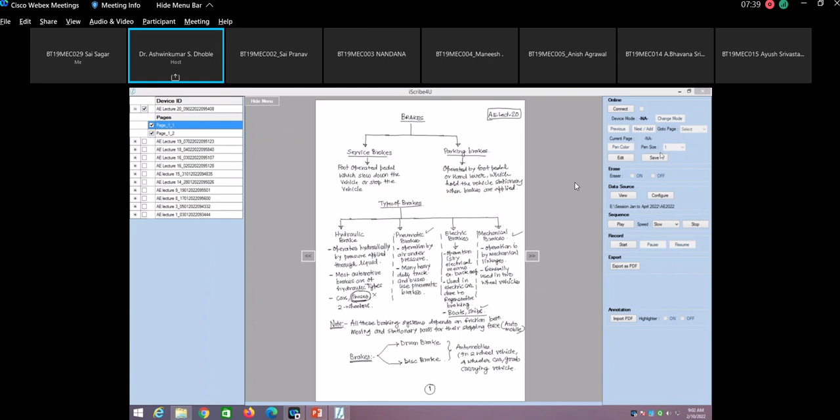So yesterday we were discussing the topic related to brakes, and there we have seen that different types of brakes are available. The requirement of the brake is that if you apply the brakes too hard, the wheels lock up, and as a result the vehicle skids sideways. If the brakes are applied less hard, the wheels continue to rotate. That means in both cases it is not advisable to apply the brake very hard or less hard. So there has to be some golden mean between the brake effort and the brake system. The brake must be applied to the point at which the wheels are almost ready to lock, on the verge of locking but not getting locked. So this was the brief background.

So with this background, we will start with the first type of brake, that is the drum brake, and I will draw the figure for the drum brake, how it looks. Today we are going to discuss the drum brake. This you have studied, but here we need to fully take up the topic on the drum brake.

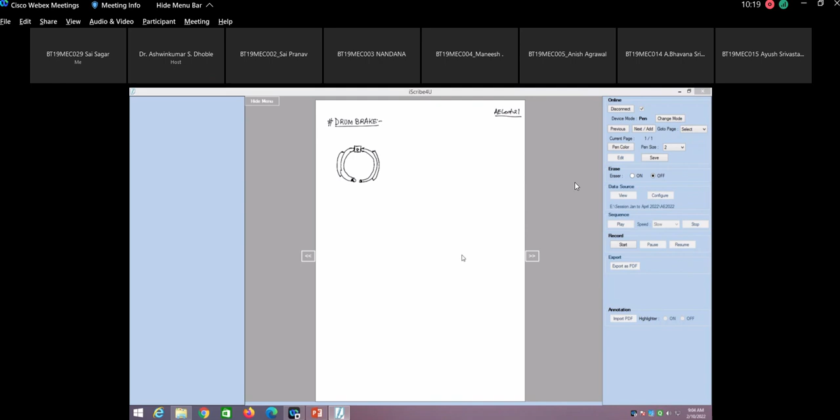So here we have got the small cam, and here is the brake shoe surface. So brake shoes are made like this. This is pivoted at this particular point, and here we are going to have the friction lining. I will draw the friction lining with some different color.

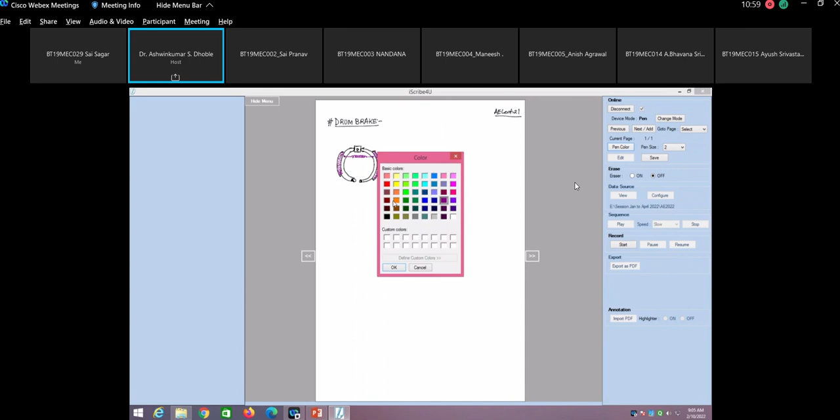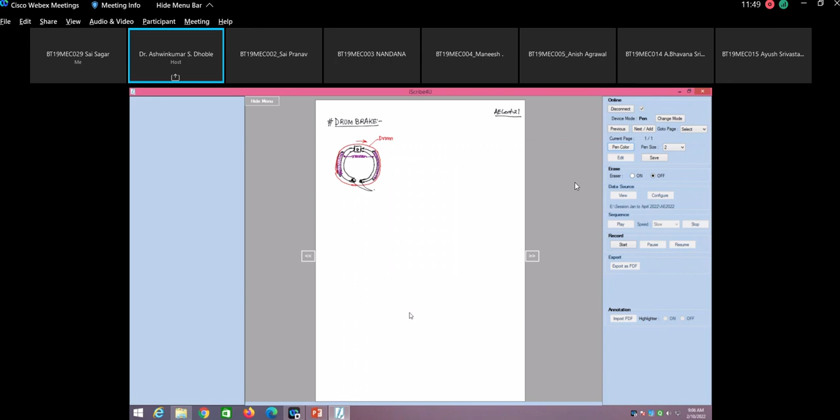So this is the friction lining. There is a spring connected in between this shoe, and the outer portion of this is basically the drum, the red color one which I have shown here is the drum. So these brake shoes are pivoted at this particular point. These are the anchor points. This is the spring. This is called the friction lining.

What is this part? This is which part? The square one on the top is which part of the brake? What do you call that? This is which part? No, that is not the pivot. That is basically a cam.

So when you operate the cam, that is the actuator part, that is correct. That is the cam, you can say that. When you apply it, what is going to happen if you rotate this particular cam, the shoes will move apart in this particular direction because they are pivoted at this point. So the friction lining material comes in contact with the drum, and that is how they absorb the kinetic energy of the rotating drum, and the speed is reduced.

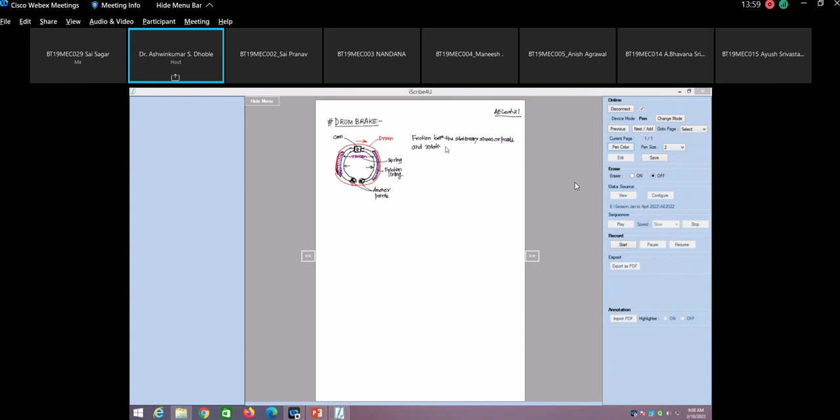Okay, so this is basically the background. The friction between the stationary shoes or pad and the rotating drum or disc produces the braking action that slows or stops the wheels.

So actually these mechanical drum brakes, suppose now the friction lining material wears out. Please try to understand, this is basically the thing that most of the time, most two-wheelers have this kind of brakes. Specifically, if you see the Luna vehicle, nowadays it is not in use, but if you see the Luna vehicle, you will find that such kind of brakes are used. Now in case this friction lining material is worn out and there is a gap, for example, I am just trying to show you only one portion. This is the outer drum and you have got this cam.

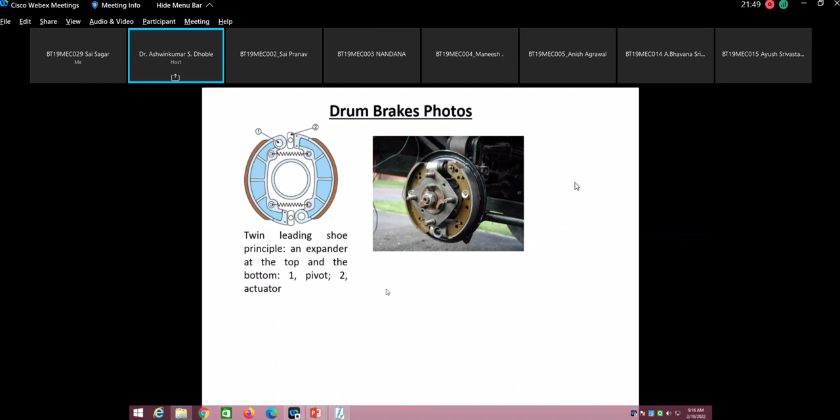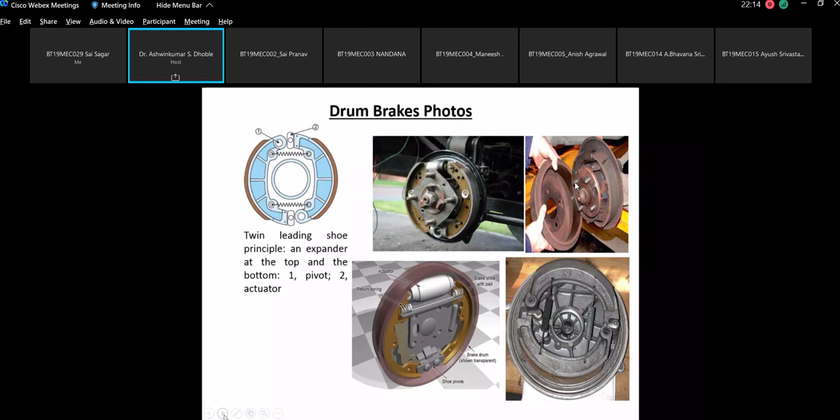The same kind of shoe and construction is shown here. This is basically the actuating cam, and these are the brake shoes. Then this is how you can do the assembly - this is the complete assembly of the brake shoe. This is the brake shoe with pad, the brake drum shown transparent, and the shoe pivot. Here is the other view of the brake drum with spring and cam, everything. In the next slide, it shows the brake assembly completely.

Now next is the disc brake. We'll try to see what you mean by disc brakes. Is this clear? Does anybody have any doubt as far as the drum brakes are concerned?

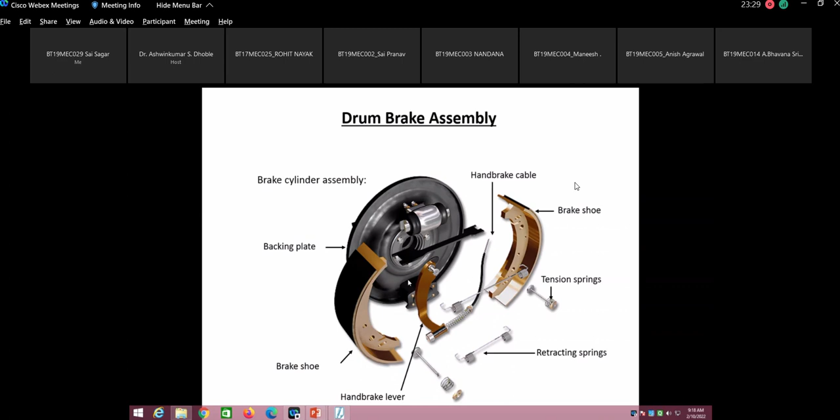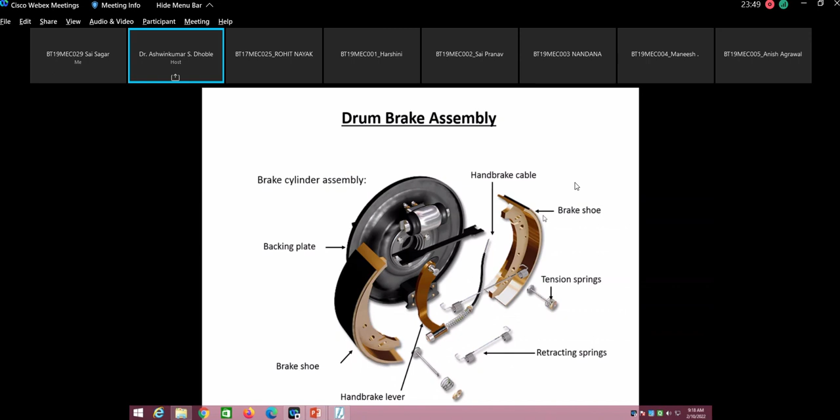Sir, here the handbrake cable is shown, why do you require this handbrake cable? The handbrake cable is basically because the same brake shoes are used as parking brakes as well. So when you stop the vehicle and are parking it, before closing all the doors and parking, you just have to pull the handbrake so that you can apply the brakes in the standstill condition of the vehicle.

So now let us go to the next topic, that is basically the disc brake. Now just read this: the disc brake system consists of...

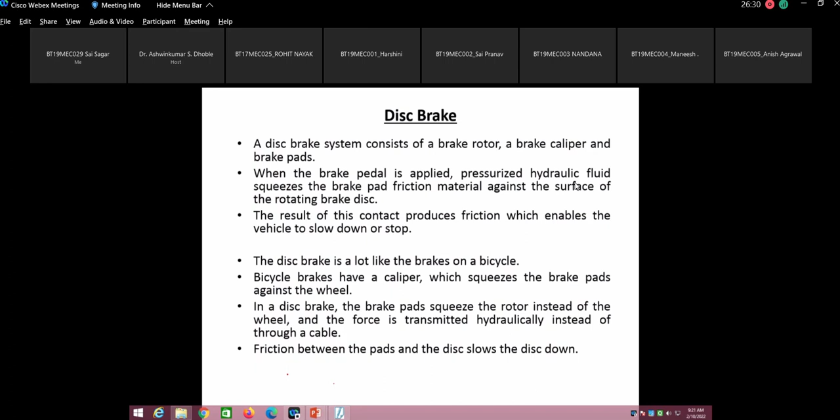Sir, you think about this, we will move ahead. So the result of this contact produces friction which enables the vehicle to slow down or stop.

The disc brake is a lot like the brakes on a bicycle. Bicycle brakes have a caliper which squeezes the brake pads against the wheel. In the disc brake, the brake pads squeeze the rotor instead of the wheel, and the force is transmitted hydraulically instead of through a cable. Friction between the pad and disc slows down the disc.

See here, dust or dirt? No, that is not the reason, sir. There has to be some technical reason for that. So we'll discuss that, don't worry.

In a disc brake, these lines distinguish between the disc brake and drum brakes. In a disc brake, the brake pads squeeze the rotor instead of the wheel. Please understand this, this is very important. The force is transmitted hydraulically instead of through a cable.

This means these disc brakes are hydraulically operated. They are not operated by linkages. So that is the main issue as far as disc brakes are concerned. Friction between the pads and the disc slows the disc down. So this is basically the principle.

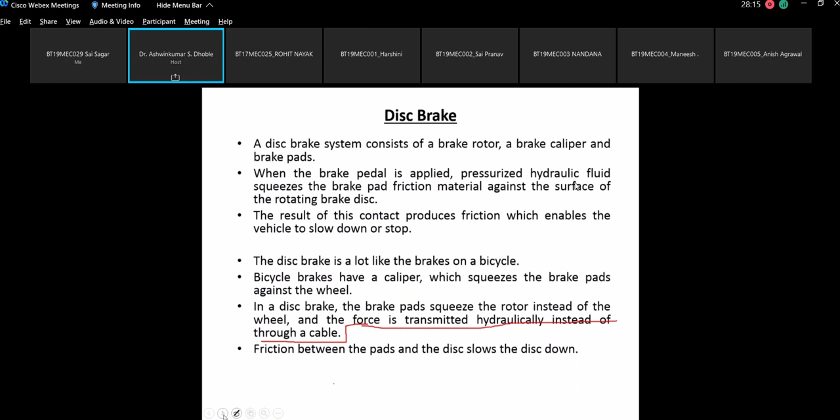If you fit the rotating disc, then you can catch it with the side caliper. So this is the layout of the disc brake. This portion is called the caliper. This is the rotating disc. The side view of this brake shows you have the wheel attached here.

There is a disc which is attached to the wheel hub, and this is basically the disc. The same disc is shown here. This is the disc, and these are the calipers. When you force the fluid under pressure here, this will move the brake shoes or brake pads, and they will catch hold of the rotating disc. This is basically the rotating disc, and this is the power piston.

Since they apply the force which is perpendicular to the direction of rotation, the caliper holds the disc along the axis of rotation, and that is how you can stop it. This is basically the portion shown here, the complete portion. So that portion in hardware is shown here.

The basic idea is the shoe area. This blue colored shoe area equals 12 to 16% of the disc area. Clearance between the shoe and disc is of the order of 0.05 to 0.15 millimeter, which reduces the actuation time. The clearance is kept so tight that the moment you press the pedal, the hydraulic fluid will push this piston ahead.

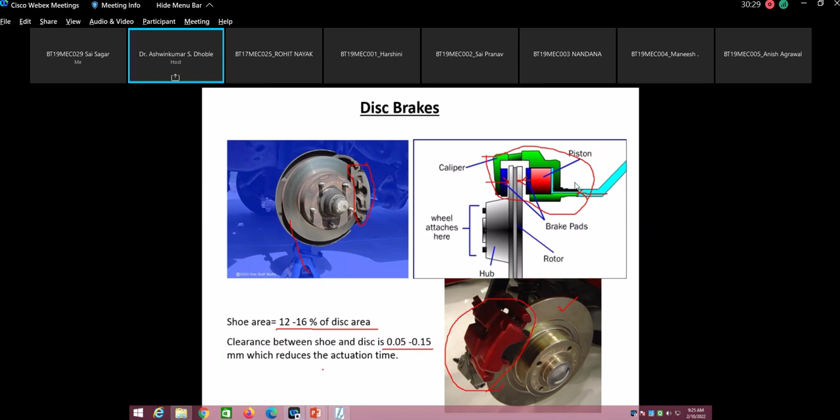So that it can be in contact with the disc, and that is how the disc will stop immediately. I will draw the two-dimensional sketch for that, so that if it comes in the exam, you should be able to draw it. I have one more question for you regarding the disc brake. You have to draw the disc brake first. Let us try to draw it.

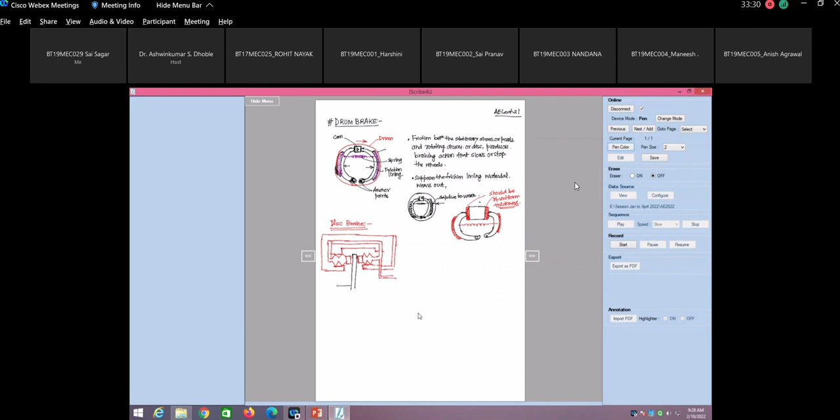I'm showing only half part. Here this is the complete body of the caliper.

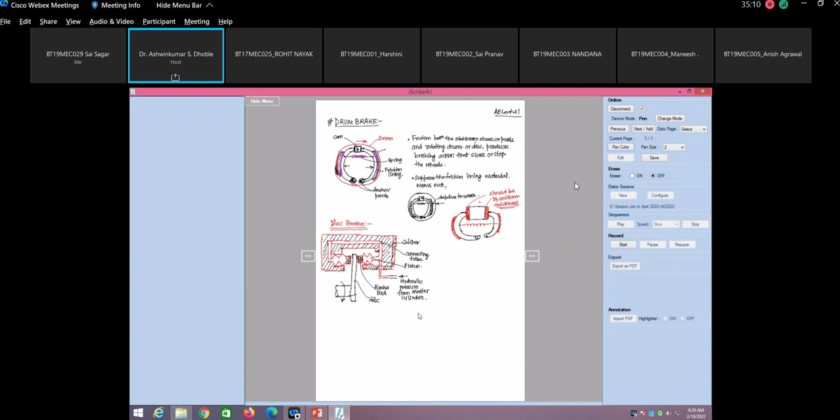Now what is going to happen? You are going to supply the hydraulic pressure from the master cylinder. So this is the caliper, this is a connecting tube, and these are the pistons. This particular portion - these are the brake pads. This is the disc. This rotates. So this is the actual schematic diagram of the disc brake.

Please note that this shoe area is 12 to 16% of the disc area. And now let us come to this particular disc.

If I have to show you the disc, then this is the disc, this is fitted on the hub. So if I draw the side view of the disc - this is the disc, and on this particular disc you might have seen some holes are there. They are punched randomly. So these are basically the holes.

Can anybody tell me what is the purpose of these holes? Ventilation and heat dissipation - okay, very good. Avoid eddy currents - why would eddy currents form, sir? So these holes are for heat ventilation, okay, that I agree. But I do not agree to avoid eddy current. Provide space for thermal expansion - okay, so heat dissipation and all that will cover that, Saurabh.

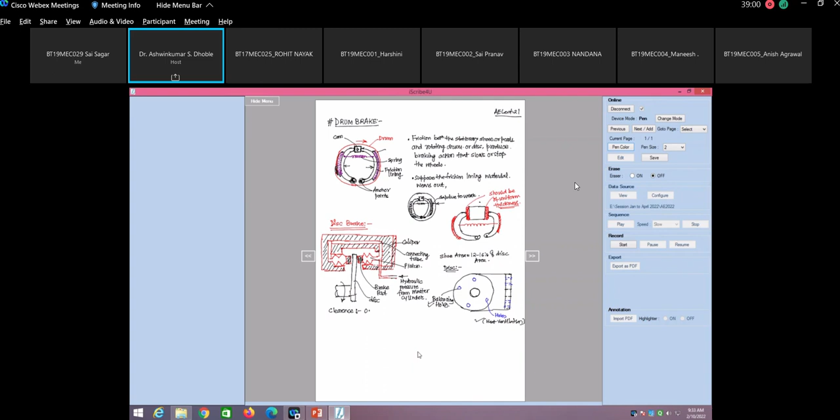If you see the clearance between the shoe and the brake, it is of the order of 0.05 to 0.15 millimeter. So to maintain this kind of tolerance, the plate should be balanced. Otherwise what will happen - when you drive the vehicle, either the shoe will wear out or your disc will wear out. If this happens like what I have shown here, in that case there will be an issue.

The disc brake will lose its effectiveness. So have you understood, sir?

So sir, what you do is you only think in one direction. See vibration - you have studied Theory of Machines 2. In Theory of Machines 2 there is a topic on balancing and we take it very lightly, but please note that balancing is achieved in almost all rotating components, whether used in machine tools, automobiles, or some other system. Please note that if there is no balancing of the component, the system cannot function.

So balancing is a very important aspect. Don't think from the point of view of 5 marks, 10 marks from the examination viewpoint, but please be careful that all these things are practically applied, and wherever you find the rotating part, remember that we have studied balancing of the wheel because that is a rotating part. Balancing of the wheel is a very important topic in our day-to-day life. If you lose the balance, then the system cannot function. So have you understood this, sir? Do you have any questions on this?

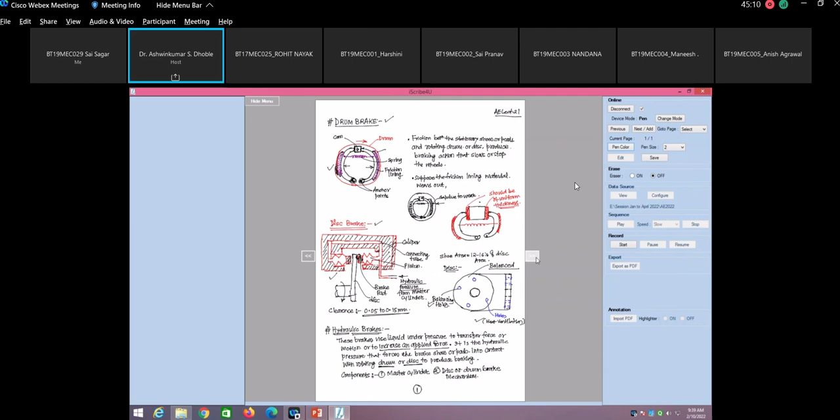Alright, so now the layout of hydraulic brake system. This layout is only for understanding how the hydraulic brakes work.

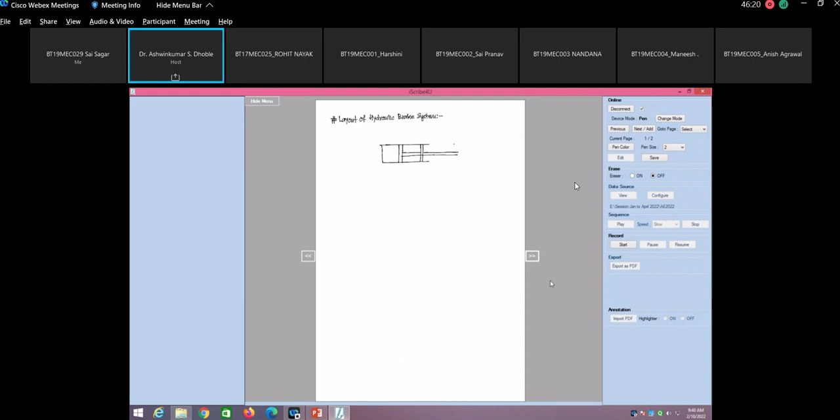So you got to have the master cylinder over here. This master cylinder has the piston - here there are two pistons. These two pistons are connected with the brake pedal.

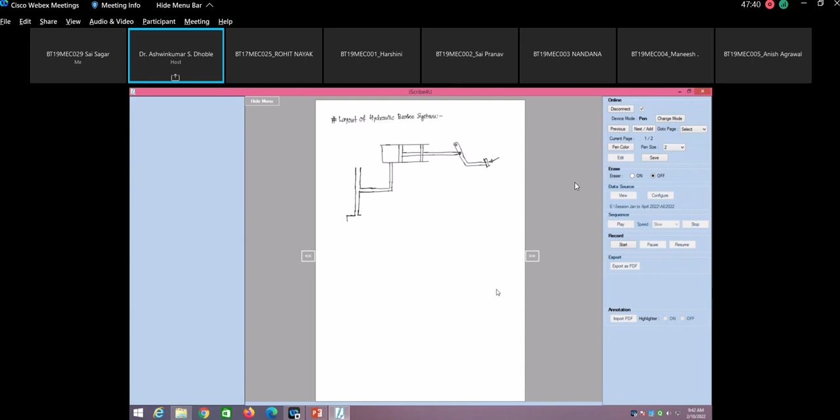Now here this line connects here, this will go to - here there is a bifurcation - here it is getting connected to the system where you attach the brake pedal.

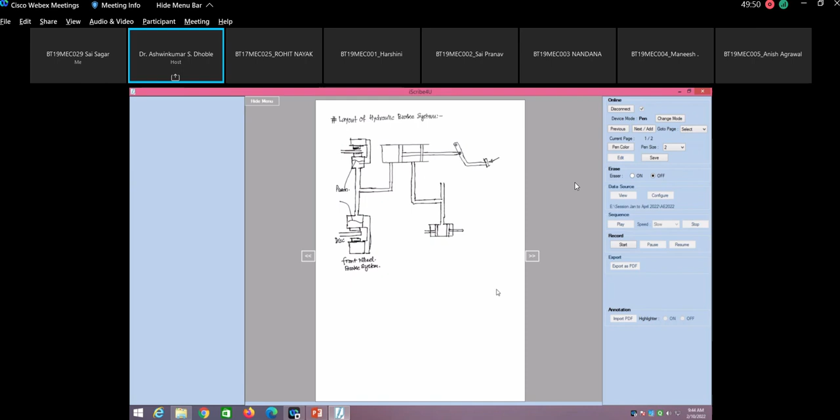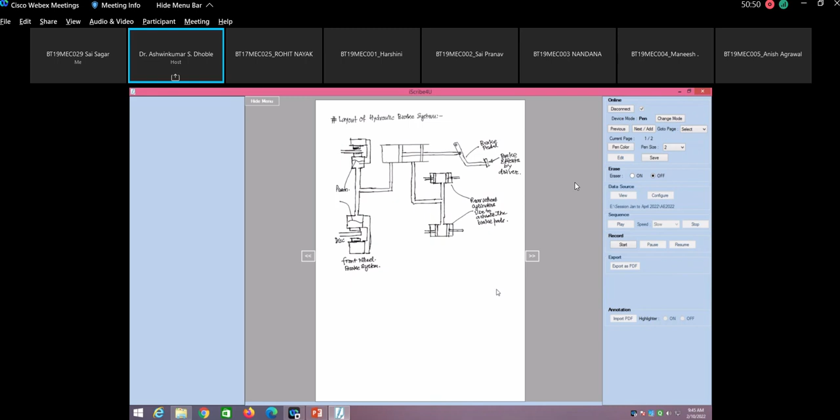So these are the rear wheel cylinders used to actuate the brake pads, correct. So these are both - this is your brake pedal, these are brake efforts by the driver, this is the master cylinder. Now what happens here - the working is very very simple, please understand. As soon as you press this, fluid will go here, then it will press fluid through this, fluid will go here and here, and will actuate the brake pads like this. So this is one part of the circuit.

The other part of the circuit is: fluid under pressure will come here, will go here, and will push these so that you can actuate it, so that this will move apart.

Please note you may have a question - once we pressed the brake pedal, fluid under pressure actuates the brake, but how does it come back to the original position? So please note that the oil under pressure can retract back when the brake efforts are removed, because all these cylinders are fitted with a spring kind of arrangement.

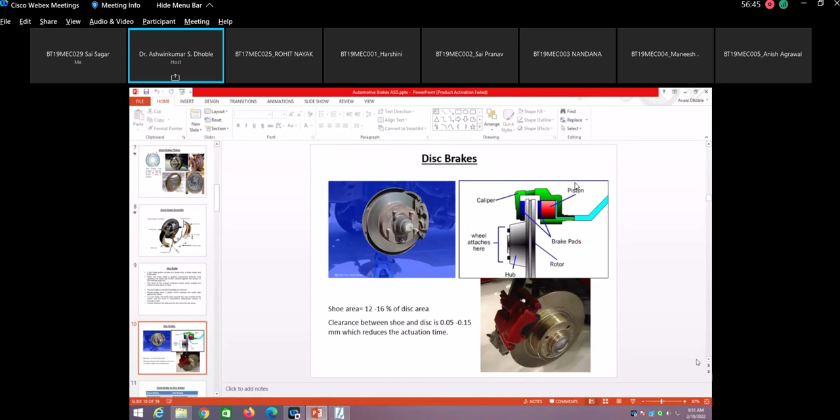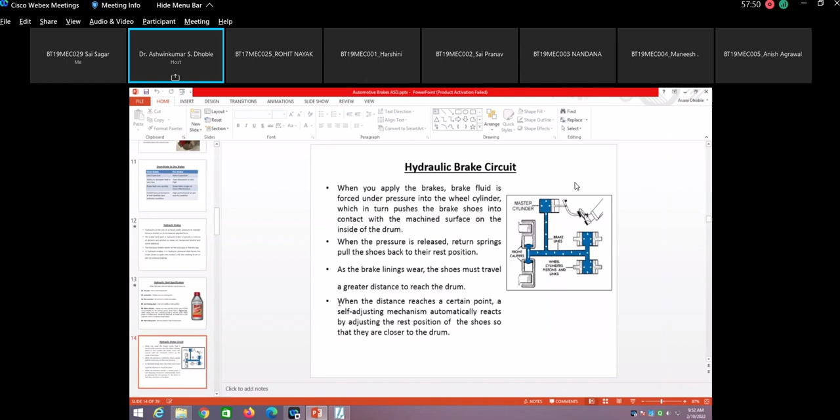So this is the same circuit, I will explain it to you. This is the reservoir. In case of any leakage, the brake system should not fail, so there are provisions for making it fail-safe in operation.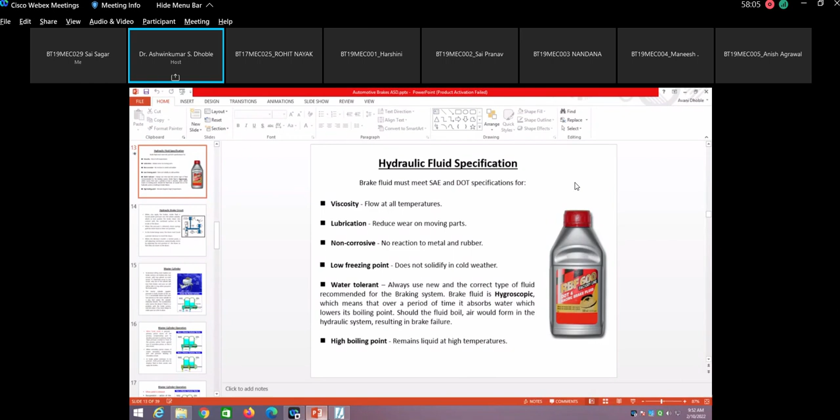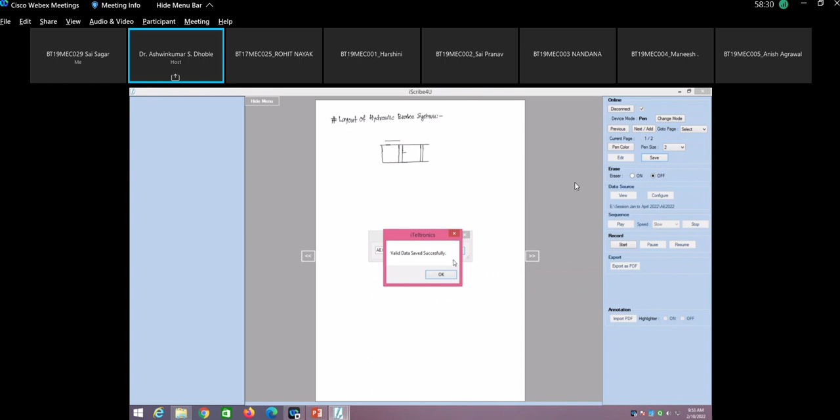With this, I think we will stop here. If you have any questions, please do ask. Prajwal asked: why are disc brakes fitted in front? Please have patience, I will answer, because there has to be some weight transfer phenomenon which happens.

So when you are driving a two-wheeler and you suddenly apply the brakes, the weight of the co-passenger and driver gets transferred to the front wheel. As a result, the front wheel has to absorb more energy in less time. In order to handle that, disc brakes are recommended to be fitted on the front wheel rather than the rear. So this is the answer to your question, Prajwal. How much weight gets transferred and all that, we will come to know when we design the spring for the suspension system. Does that answer your question? It is due to the weight transfer phenomenon.